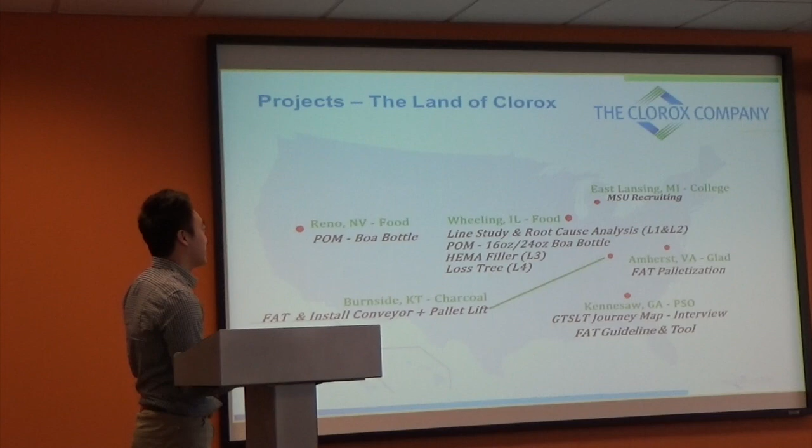Most of my time was really put into our food plant in Wheeling with our Hidden Valley product. That leads me into my first project, the Line 4 Loss Tree project at Wheeling. Basically this project was to capture the losses of the production line based off the 4 M's and the 1E. The 4 M's are man, material, method, and machine, and the 1E is environment. I'll talk about that more in depth later on.

The FAT Guideline and Tool project was something that was collaboratively worked on with my peers from the engineering group. And that helped me with my FAT Amherst palletization project, and I'll talk about that later.

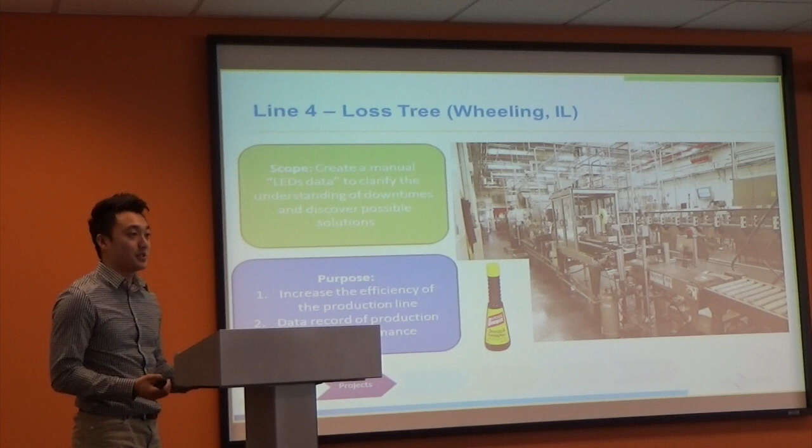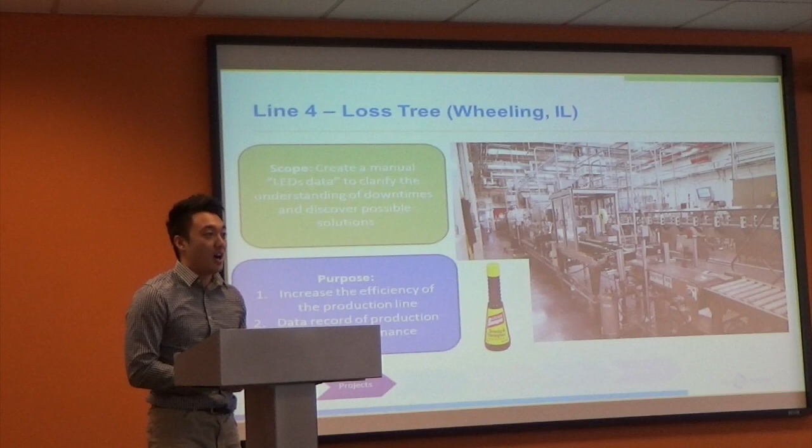So the Line 4 Loss Tree project: the scope was to create a manual data set to clarify the understanding of downtimes and discover possible solutions. The purpose was to increase the efficiency of the production line and have a data record of the line's performance. This line in particular doesn't have any record of its performance, so it's key that I was out there spending time on the line, keeping record of all those downtimes, and having some data that we can show to the plant.

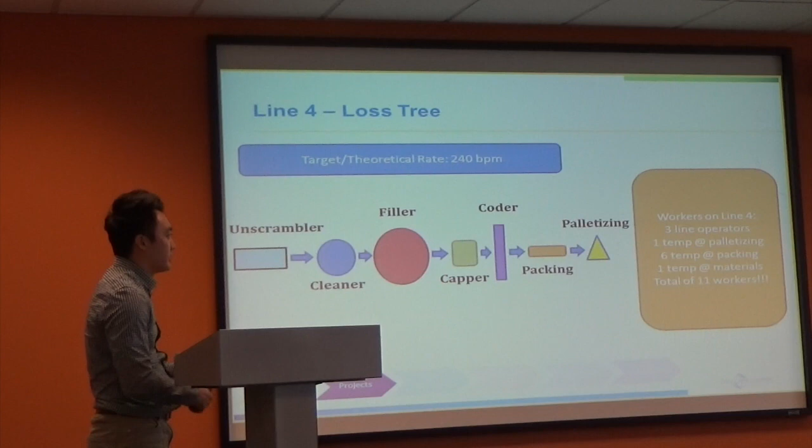So this is a brief overview of the line. What I really want to stress here is that this line is really driven by the temp workers. There's 3 full-time line operators. There's 1 temp at the palletizing station, 6 temps at the packing station, 3 on both sides, and 1 temp at the material station, going back and forth from the unscrambler and the capper, restocking bottles and caps. That gives a total of 11 workers.

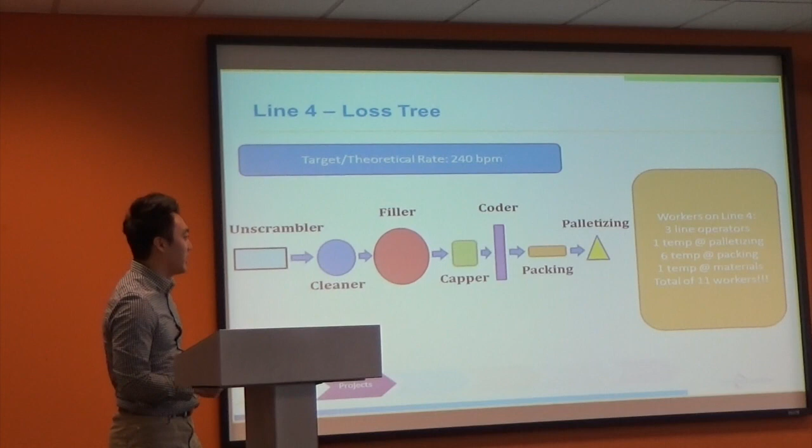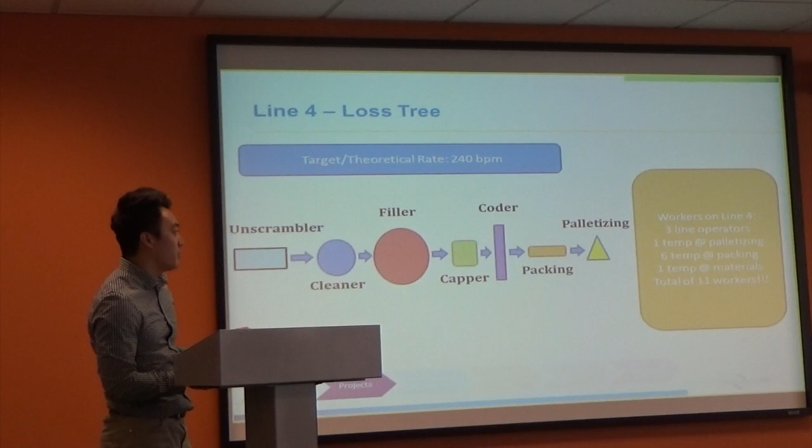So there's a different dynamic in this production line compared to the other lines. Usually you have 4 operators, but this includes 11, and out of those 11, 8 of them are temp workers. So it's a huge impact to the line and to our efficiency when we don't have a temp worker. That would mean an operator would have to cover for a temp worker. That's what I want you to keep in the back of your mind, because I'll bring that point out later. And basically where my work came in was creating the manual data, capturing all those losses.

And so to spend time at the production line just observing and making sure I know all those downtimes, when they occurred, how long it happened, how many times it happened, and what they did to resolve that issue. And then I would give a data analysis and present it to the plant. But also during my other time, I would be really creating a bond with the operators, trying to get a perspective of what they think about the production line's performance.

And so one question that I came across was about line speed. I asked them what the line speed of the line was and where they usually got it. And the operator took me to the unscrambler, which is at the very beginning of the production line. And so I was a little skeptical. It raised a lot of questions to me. I was wondering, why are they getting the line speed at the beginning of the line?

It's not as accurate as it's supposed to be, because with the other lines, you usually get the line speed off the filler, and that tends to be in the middle of the packaging line. And so that raised a lot of questions. So what I did is I raised that issue to the project engineer for this project, Jordan Leary, and I was asking her all these questions. And we decided to verify the line speed.

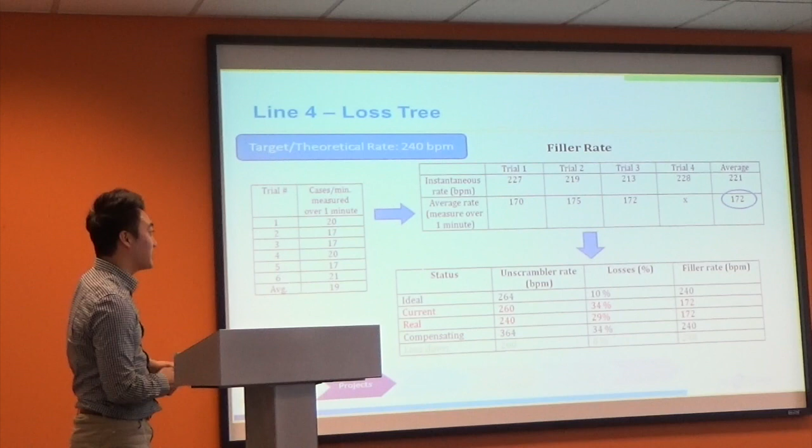So what I've discovered here, there's a lot of numbers here, but there's only two numbers that you really need to know about. That number right there, 172. I went to the filler, I counted how many bottles it produces in a minute, and at an average rate, they produce 172 bottles per minute. Our rate is set at 240. That's what our planning rate is.

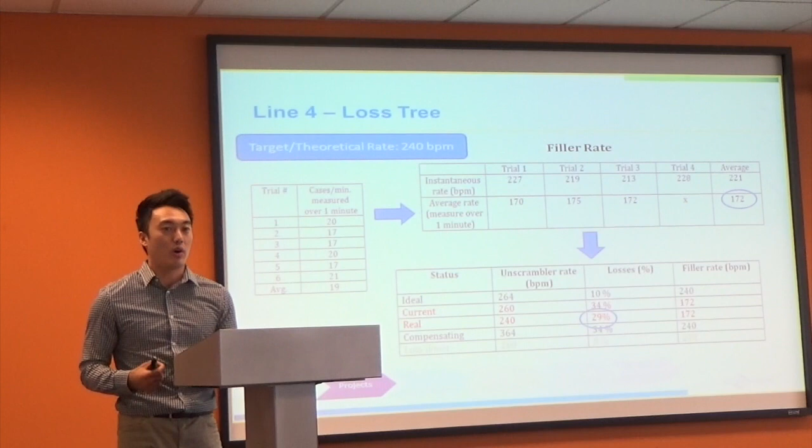And so the discrepancy that we have between those two numbers is 29%. And that is huge. That's about a third of our production. That could be going into our overall equipment efficiency. So that's a huge loss. And so I looked deeper into that 29%. What does that 29% really entail?

And so what I've discovered is that 8% of that 29% is coming from rate loss, which means the filler itself is not running fast enough to hit 240 bottles per minute. And then there's 21% of that 29%, which means that the unscrambler is not feeding enough bottles onto the line to hit 240 bottles per minute.

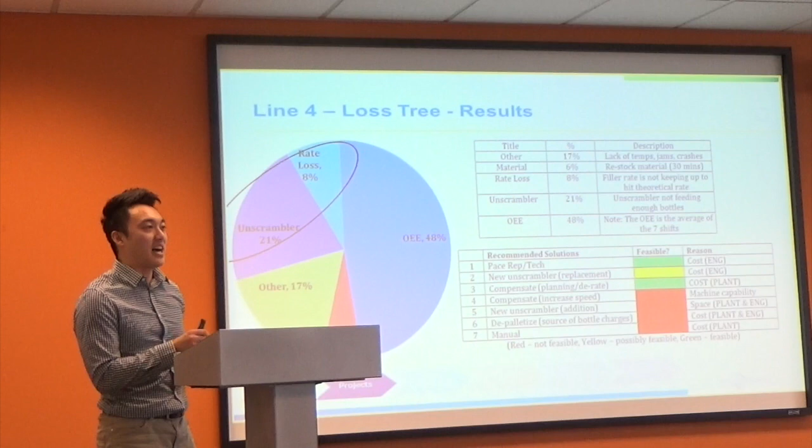And so what does that mean? It basically means that our production line is not even capable of running that 240 bottles per minute, that theoretical or planning rate that we've had in plan. And so that's really crucial, and that's something that I identified.

And then I've also put out some recommended solutions for the plant. For example, with number 1, contact the Pace rep, and that was basically the vendor who installed that unscrambler at our production line. I was wondering if it's feasible or not, and it would cost money, but it would be a responsibility of the engineer to take care of because it's the packaging equipment.

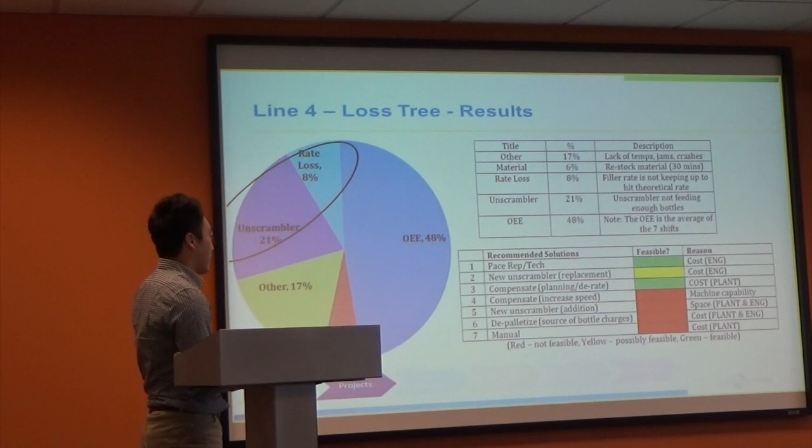And so that's just one example, but an example of an unfeasible recommended solution would be compensating by increasing the speed. We're already setting the machine at its max. So if we go any higher, it can erupt a lot of other issues. And so that would not be feasible.

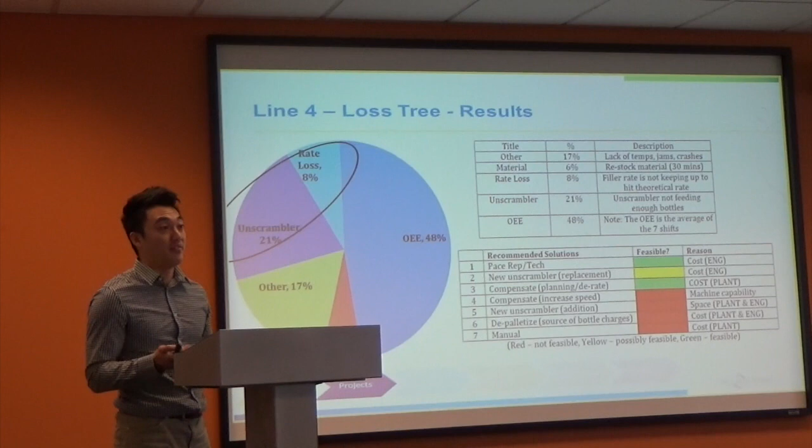And so the key takeaway of this project was to be curious, really. Ask questions. By asking questions, you're being more active rather than passive. My intention going into this project was to really just go out there and collect some data, do some data analysis, and present to the plant.

By being curious, it really drove me to find something bigger, look at a bigger picture where we are so heavily focused on the temp workers, but that's not where we're getting that big loss from. We're getting the big loss from the machine's capability, right? And so that is crucial, and that's what being curious led me to.

So the second project I talked about today is my FAT guideline and tool. The scope of the project was to create an FAT guideline and tool to help advance the understanding of the FAT and of how to conduct an FAT in a concerted way.

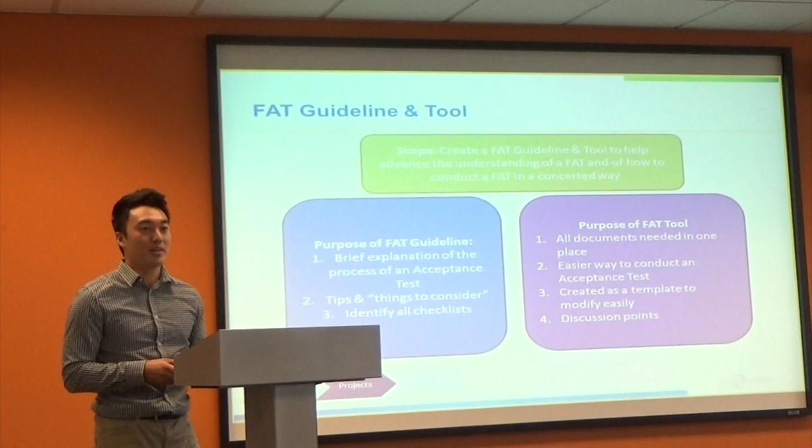So for those who don't know what an FAT is, FAT stands for Factory Acceptance Test. It's a formalized process to determine whether or not a system, most likely an equipment, meets its specifications. So that could be their quality specifications, their performance, their design, really anything.

And so with that being said, it kind of leads me into my purpose of the guideline and the tool. The purpose of the guideline was to really capture all the ideas, all the components in an FAT in one document, and really not make it into a manual where it's like 20 pages, but really to make it brief and get straight to the point.

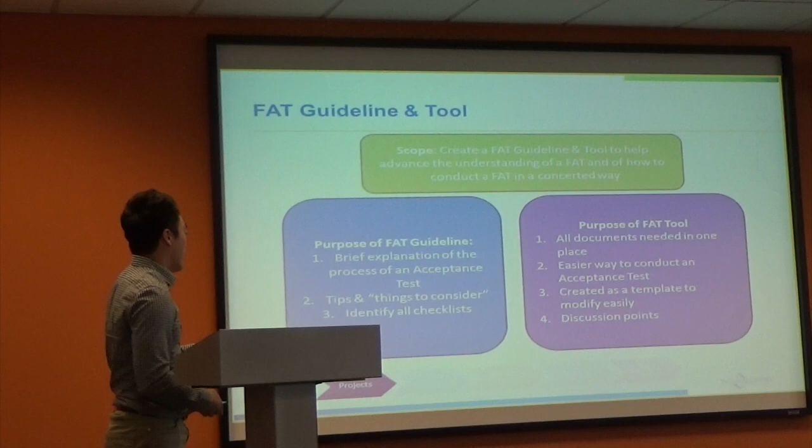And so it also entails the tips and things to consider. There are a lot of things that go into an FAT, and you can miss out on a lot of things. So with my experience and with the experience of my peers, they've included their tips and things to consider for the different components within the FAT.

And it also identifies all the checklists, so that could be a safety check. There's a lot of documents that go into safety. So that's what it does, and the purpose of the FAT tool was to really consolidate all the documents and the needs that you need in one place.

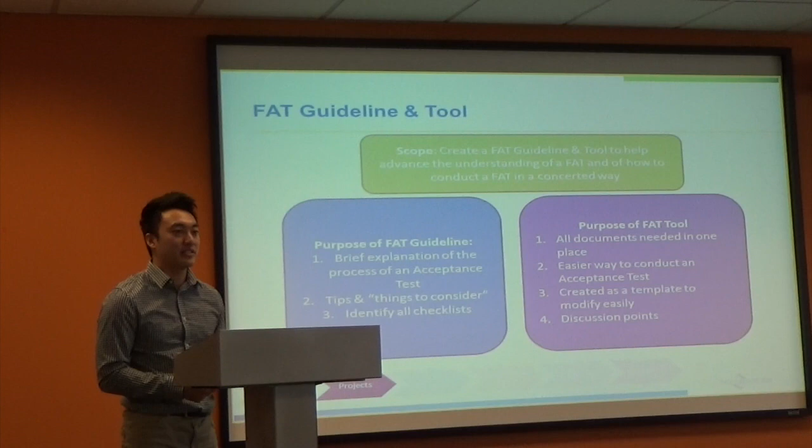So when you conduct an FAT, it makes it a lot easier. All your documents are in one place, and it's created as a template format so you can modify whatever based off your needs, whatever your project is. And then it also brings a lot of discussion points, especially with those record sheets that are in there for your tests and also your punch list items.

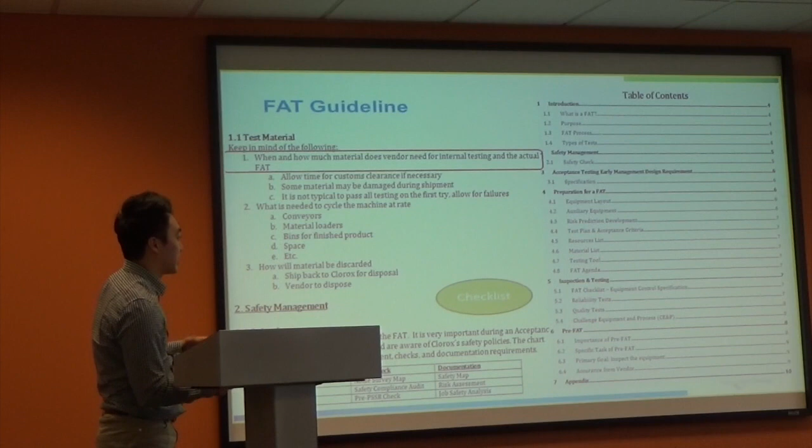And the bottom here are this checklist that I mentioned. Here on the right is just to get that idea of the components within an FAT. It tells you all goes from what an FAT is, all the way to preparation, and then an inspection, and also even the pre-FAT. This is an example of the FAT tool.

This is just a documentation checklist. What I really want you guys to get out of this one is that there are tons of documents, but it doesn't mean that it pertains to your specific project. So I've identified some of the key documents that you most likely will need, and I've attached a Word document that's in a template form and has a lot of examples in it, so you can really change it based off your needs.

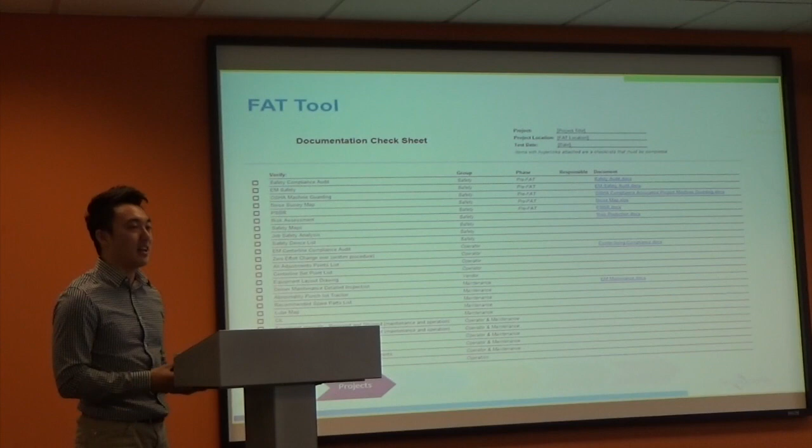This is just a record sheet for the steady state test. The two things that I want to get out from this is the acceptance criteria. So basically on the top, you're going to have the criteria of what needs to be successful for this test to be successful and the FAT to be successful. And so you would state that at the top, and then I've also included a priority column.

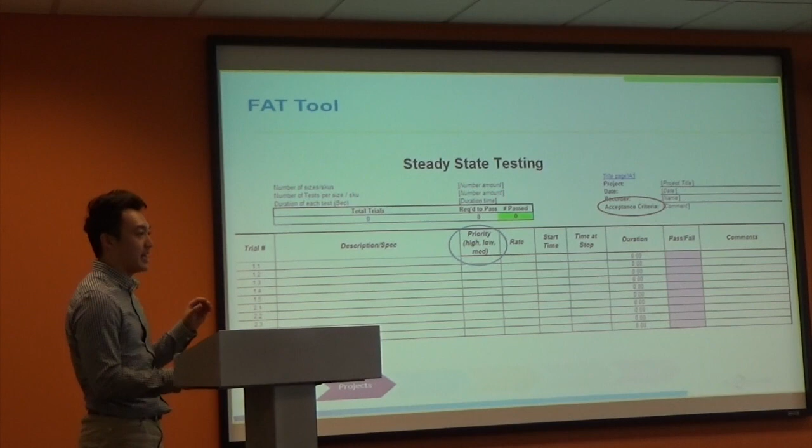So in an FAT, you're not going to be able to run all the products that you have in plan. And so you might want to prioritize them. Time could be a constraint, so you just prioritize them and say which ones you want to run with high priority at first.

So with that work, it kind of leads me into my FAT Amherst palletization project. The scope of the project was to conduct an acceptance test on the new conveyor system.

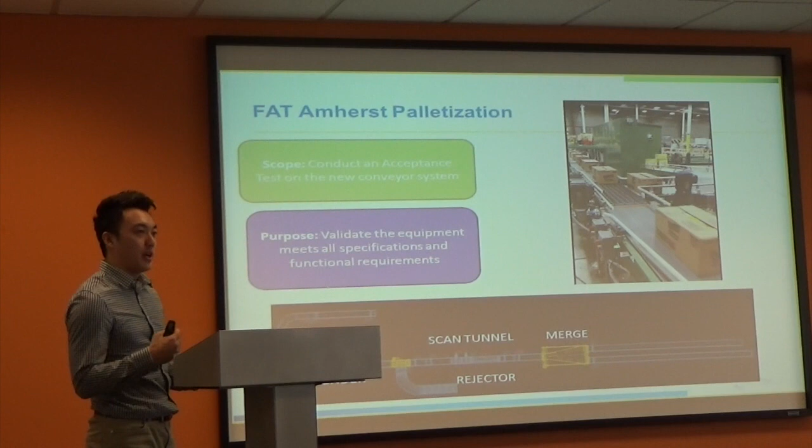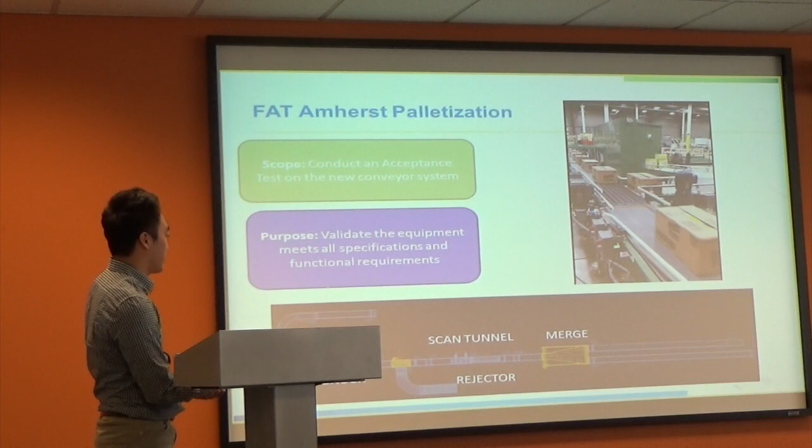The purpose of it was to validate the equipment meets all specifications and functional requirements. This is a CAD drawing of the equipment that we had at our Amherst facility, that's our conveyor system. It has all these different components. For instance, the scan tunnel and rejector would scan all these different kinds of boxes or cases that would go through and see if there's any defects, and if there are, they would just reject it.

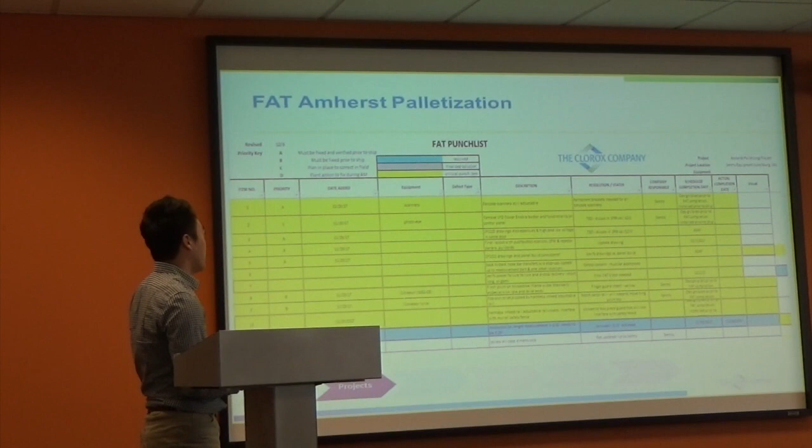This is the FAT punch list that I've created, and this is kind of neat because it also has that priorities section, the date, and it also tells you what equipment it is and what that punch list item is. This comes really in handy when you're inspecting the machine or doing the actual FAT, because when you see any faults in the specifications or the equipment's functionality, you've got to write it down. I've also included a color indicator: blue means it's resolved, gray means it has a finalized solution, and yellow means something critical that we need to get on to right away.

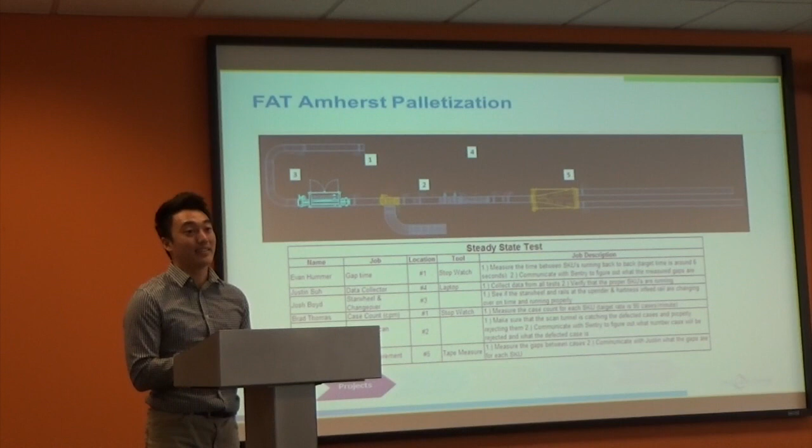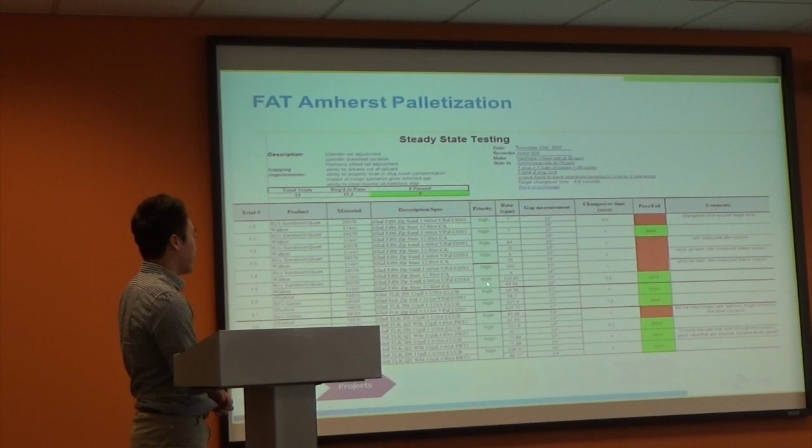This is the record sheet that I've created for this FAT. Again, highlighting that acceptance criteria, we have the gapping requirement and also our changeover time. That is an acceptance criteria that we need in order for this test to pass. We laid out all the products that we ran, the priorities and the criteria, and then determined whether it passed or failed. So that leads me into my takeaways for this project.

I think being bold and communication go hand in hand. Being bold means taking initiative and taking risks. For me, jumping into this project halfway through—this project had been going on for a long time—jumping in and telling people what to do, that's where the boldness comes in. And communication means making sure you're delivering the right message. When we have discussions during meetings with our vendors or with our project team, communication comes into play right there.